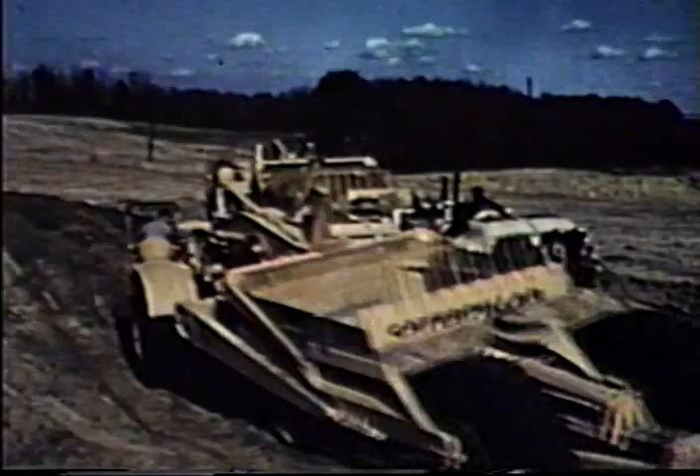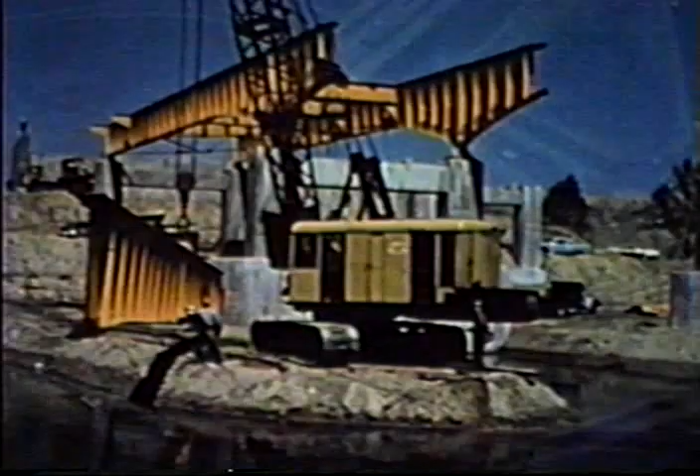It's been a massive undertaking, spanning 40-plus years, costing well over $100 billion, stretching from coast to coast. Ever since President Eisenhower signed the Federal Highway Act in 1956, the focus of transportation funding has been on construction.

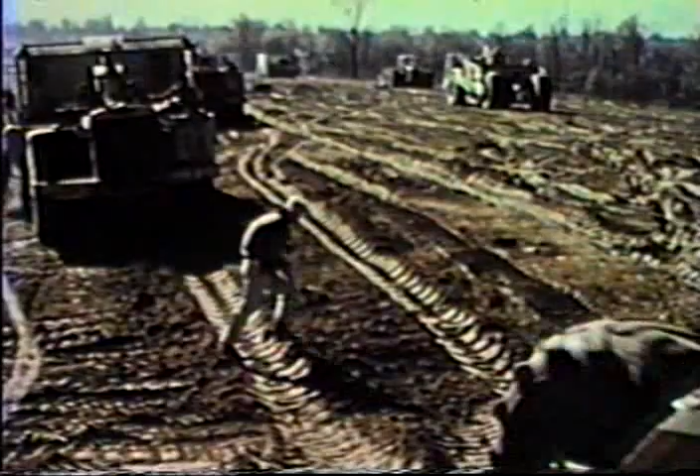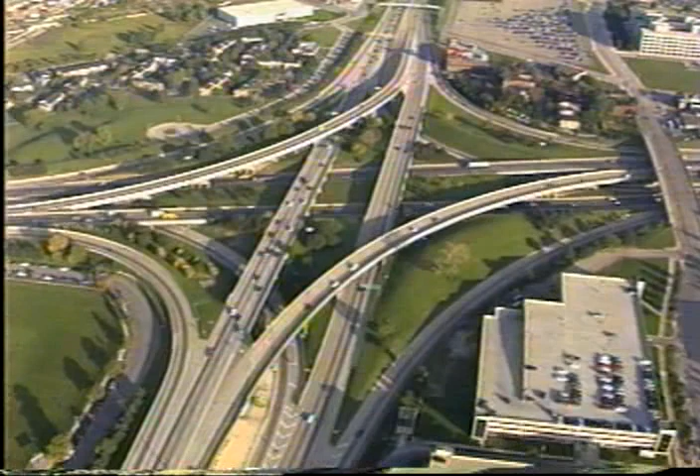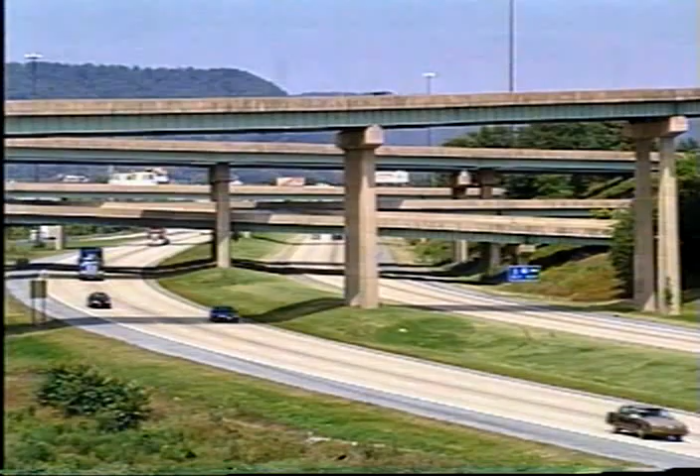Our interstate and national highway systems are the largest public works projects in our country's history, achieved through a unique partnership between the states and the federal government, forming the foundation of our transportation infrastructure, the backbone of our nation's economy.

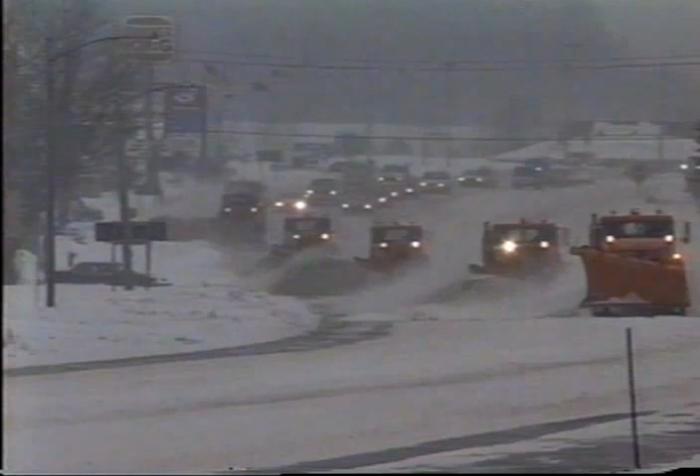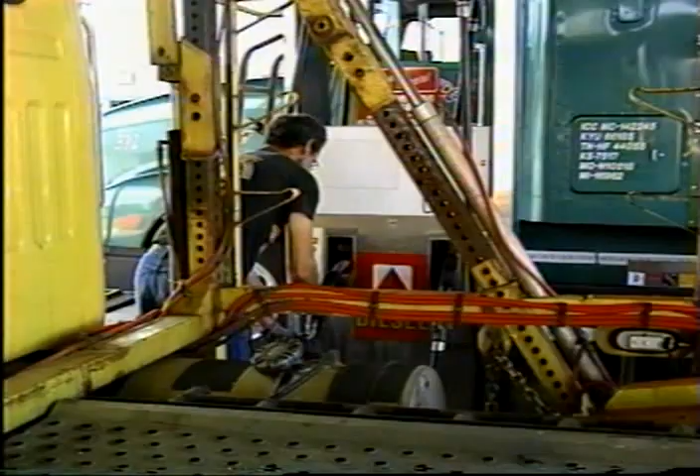Time, traffic, and nature take their tolls on our pavements as the demands on our highway network continue to increase dramatically. At the same time, operating funds have decreased significantly. Revenues simply don't keep pace with needs. In many cases, too, severe reductions in staff contribute to the burden and to the problem.

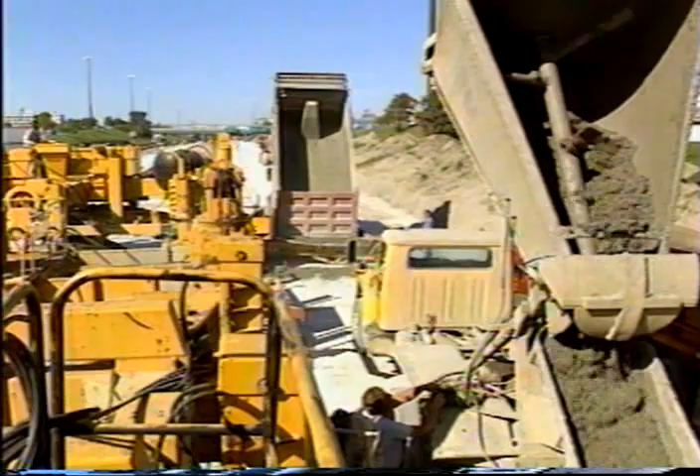For many years, the resources needed to sufficiently preserve our highway infrastructure have been underfunded. We now have needs that far exceed the resources available. The old philosophy of worst first meant directing funds to highways most in need of costly rehabilitation and reconstruction.

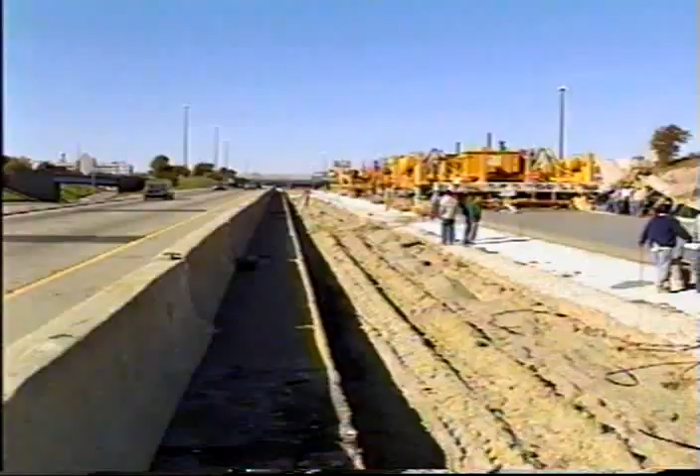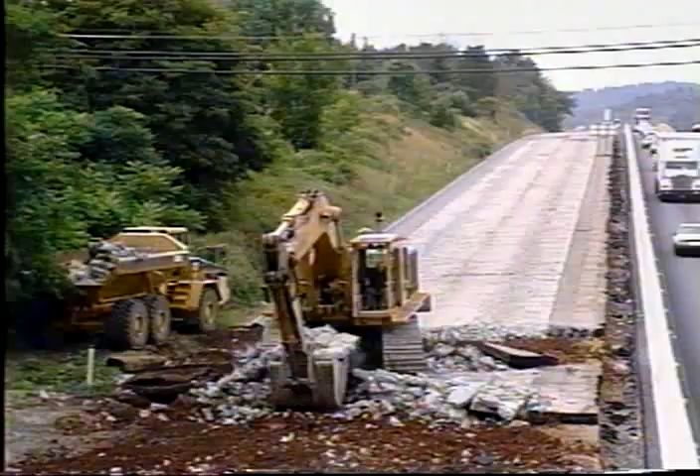Preventive maintenance has too often been delayed or neglected entirely, causing minor defects to become major ones, requiring more expensive repairs, disrupting traffic for longer periods of time, adding much higher costs and inconvenience over the life of the pavement. But the old philosophy is shifting to a new paradigm, protecting our pavements through preventive maintenance.

One of our prime responsibilities is to maintain the investment we have in our transportation infrastructure. And the best way to do this is through preventative maintenance. Congress and the Federal Highway Administration are committed to the timely preservation of our highway infrastructure.

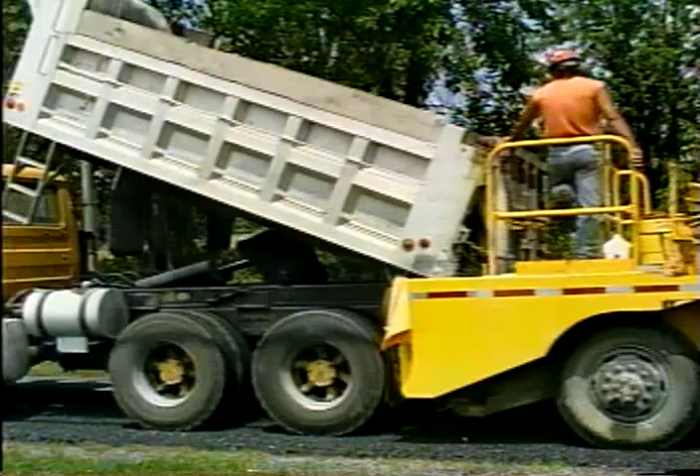As a result of amendments to the Intermodal Surface Transportation Efficiency Act, strengthened by changes to the National Highway System Bill, federal aid funds are available for cost-effective preventive maintenance programs. Preventive maintenance that extends the useful life of our transportation assets.

Every year we extend the useful life of a pavement or a bridge is a year that we don't have to make that large investment needed to rehabilitate or reconstruct. We can continue to provide a level of service our customers want and even demand with a smaller investment and less disruption to traffic.

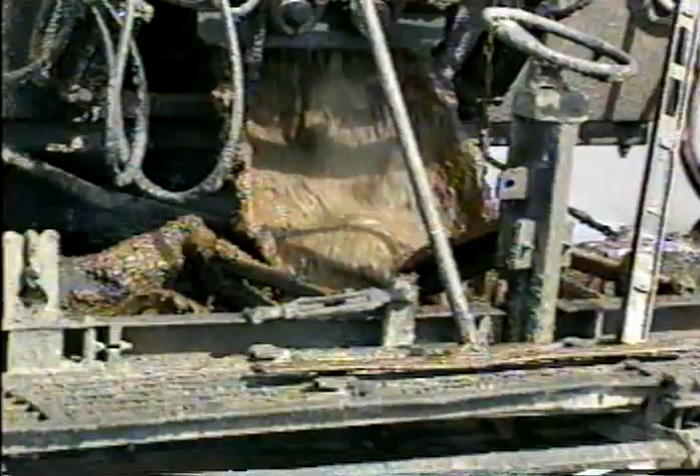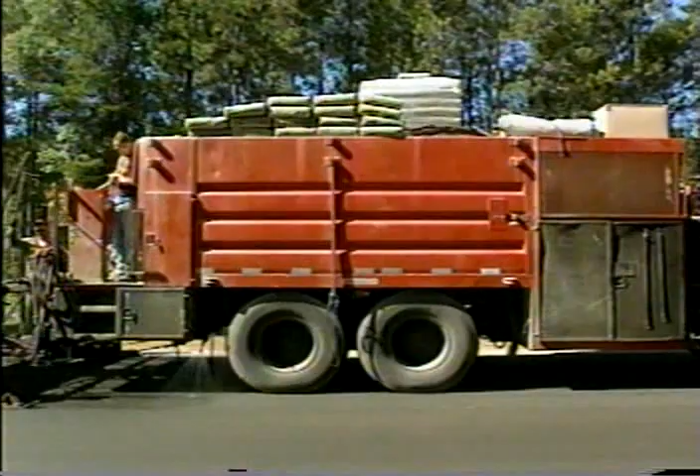Unlike reactive maintenance that works to correct a specific pavement distress, preventive maintenance is proactive, making the most of modern, cost-effective ways to preserve and protect pavement integrity. The goal is to keep the highway network at a given level of quality. And the benefit? Preventive maintenance decreases the rate of deterioration and can delay for years, maybe even indefinitely, costly reconstruction of pavements.

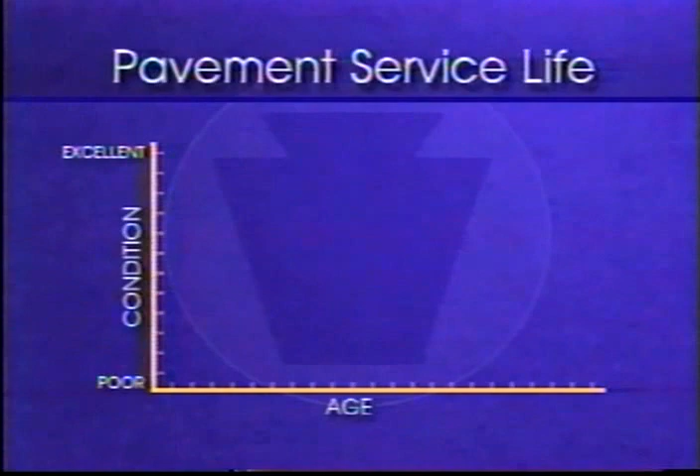Hello, I'm Gary Hoffman, Chief Engineer for the Pennsylvania Department of Transportation. Pavement deterioration of all types can best be represented by this characteristic curve. During the first portion of a pavement's useful life, the pavement is generally smooth and the rate of deterioration is slow. However, as the pavement ages and gets rougher, the daily pounding of heavy vehicles begins to take its toll.

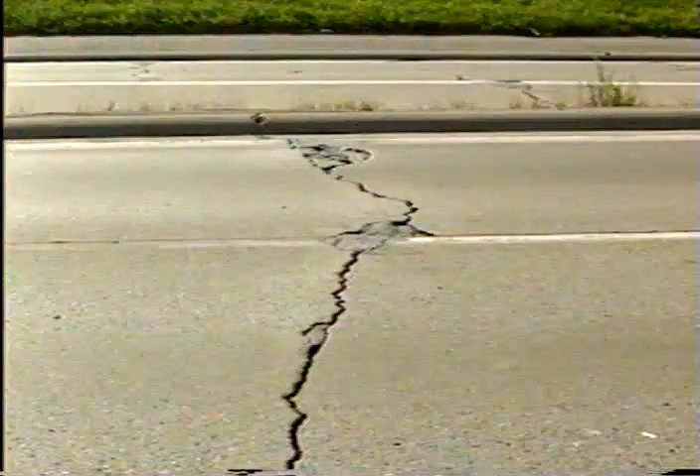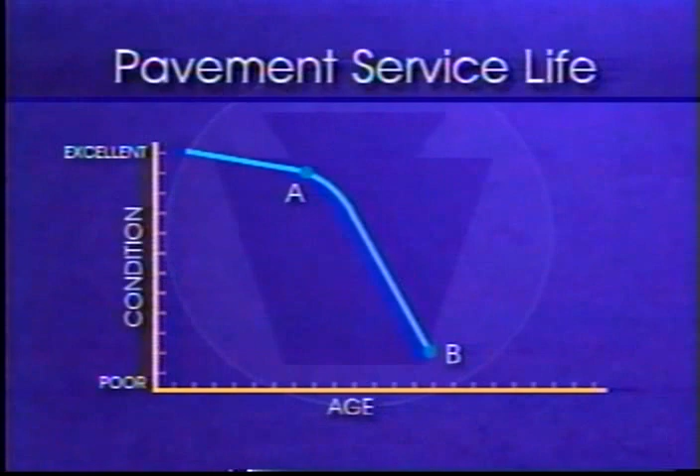Surface cracks develop, water forces its way into these surface cracks, and the pavement deteriorates more rapidly. It is easy for just about anyone to tell when a pavement has reached the end of its useful life, represented on this chart by point B.

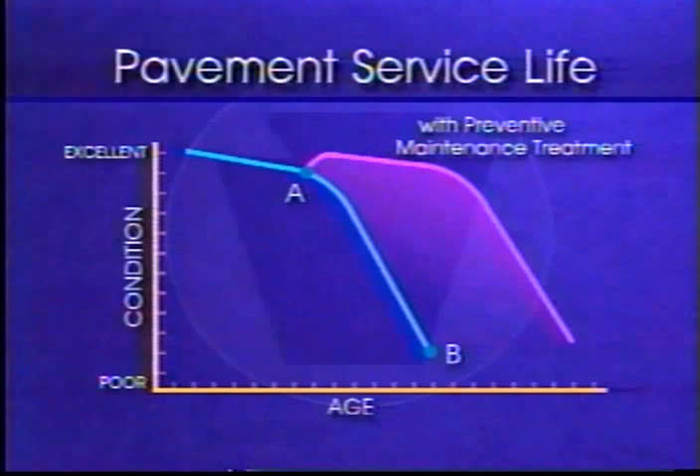The real key to a successful preventive maintenance program lies in an agency's ability to predict when a pavement will reach point A, and then to program sufficient resources to apply the right preventive maintenance treatment. If we can continue on a major portion of our system to extend its life for relatively low cost, another 5 to 10 years, and repeat this, the overall savings in the long run is going to be very, very substantial.

The American Association of State Highway and Transportation Officials defines preventive maintenance as the planned strategy of cost-effective treatments to an existing roadway system and its appurtenances that preserves the system, retards future deterioration, and maintains or improves the functional condition of the system without increasing the structural capacity. In essence, it means doing the right treatment to the right road at the right time. And the right time to begin is now.

Given this positive interest by Congress and AASHTO, it is now incumbent on each of us, working collectively, to advance the concepts for timely preventive maintenance. We must focus on the technical aspects of materials, design, and construction practices. Improved planning and dedicated funding strategies are also essential for the successful development of a pavement preservation program.

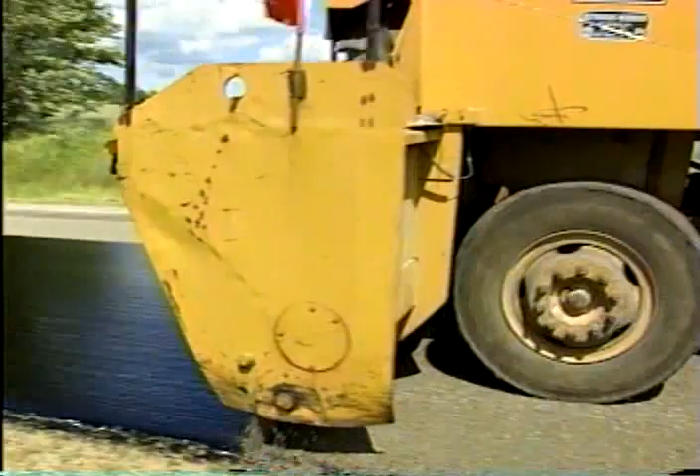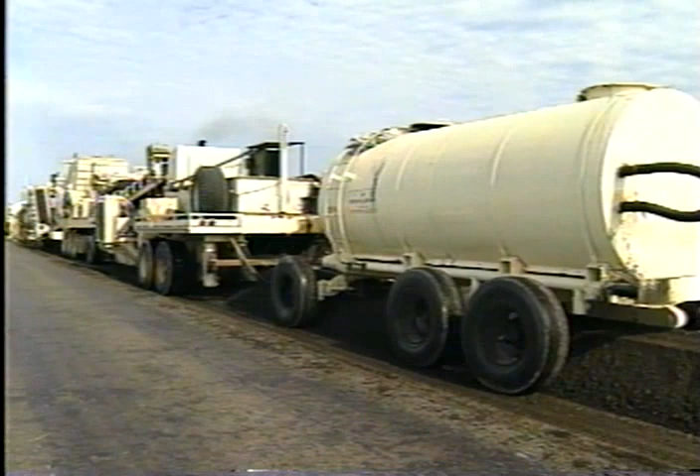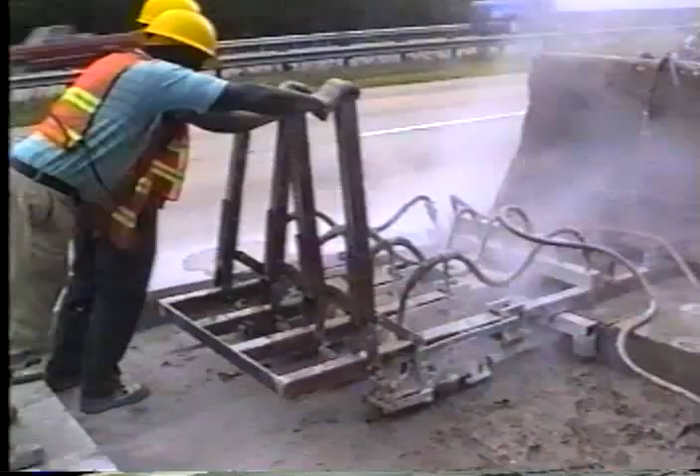Techniques of preventive maintenance range from relatively inexpensive bituminous crack sealing, micro-surfacing, and chip sealing to the more expensive thin asphalt overlays to other techniques on flexible pavements such as in-place recycling of existing asphalt. For rigid pavements, the treatments include full-depth concrete pavement repairs, joint resealing, diamond grinding, and dowel bar retrofits for aging concrete roadways. Using less expensive treatments where appropriate enables spreading the preventive maintenance dollars over more route miles.

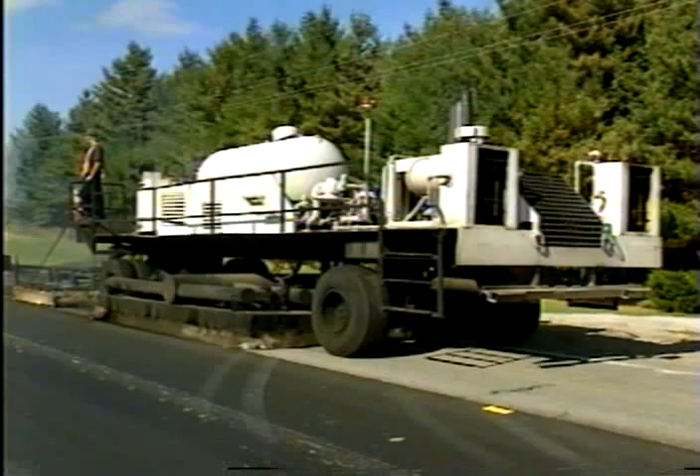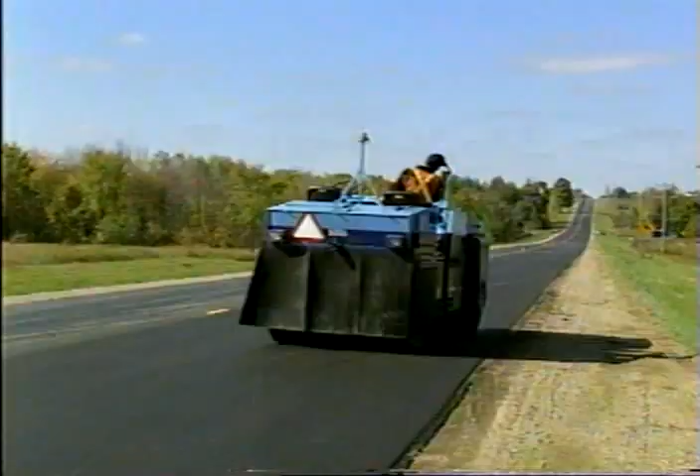Because staff members may not have much knowledge or experience with preventive maintenance methods, a strong commitment to training is essential to the success of the program. People and resources are available to teach personnel about the performance characteristics of the various techniques, how to select pavements that will benefit from preventive treatment, and when, in the life of the pavement, is the right time to do the job.

For example, if crack sealing will correct the condition, then there's no need to apply a seal coat or thin overlay. To be cost effective, it's important to keep the project as simple as possible. Improved planning is the crux of the preventive maintenance program. Here, too, simplification leads to savings. Projects should be kept very, very simple in a preventative maintenance program.

In Kansas, we let our projects with sketches on 8.5 by 11 sheets of paper prepared by our field people and included in the project proposal. It's been very effective with our contractors since most of these are crack filling, pavement patching, thin overlays, even thicker overlays where we're not changing the cross-section considerably. There's no need to waste a lot of time on fancy plans.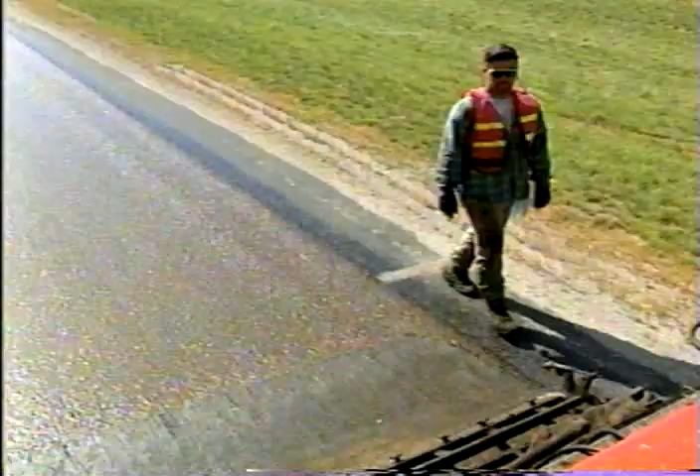Simplified business processes give more responsibility to private contractors for quality control. Preliminary engineering costs, those related to design of the project, are lower. Construction engineering costs are also substantially reduced. But it takes the third element of a preventive maintenance program, dedicated funding, before any long-term savings can be realized. Dedicated funding requires a strong commitment to the philosophy of preventive maintenance, making the choice to preserve relatively new roads with the right treatment at the right time.

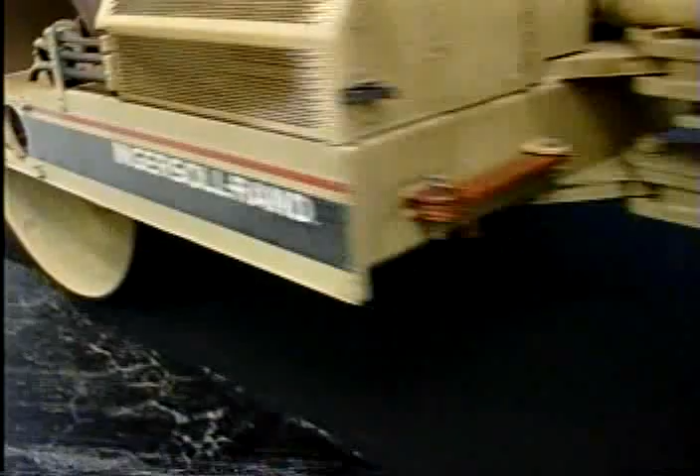One of the problems in getting this program started was with the district engineers. They would say, why are we spending money on a relatively good pavement when we've got terrible pavements that need to be reconstructed? This is a little bit of biting the bullet and spending the money on preventing problems rather than 6 to 8 times more to reconstruct or rehabilitate it after the problem becomes serious.

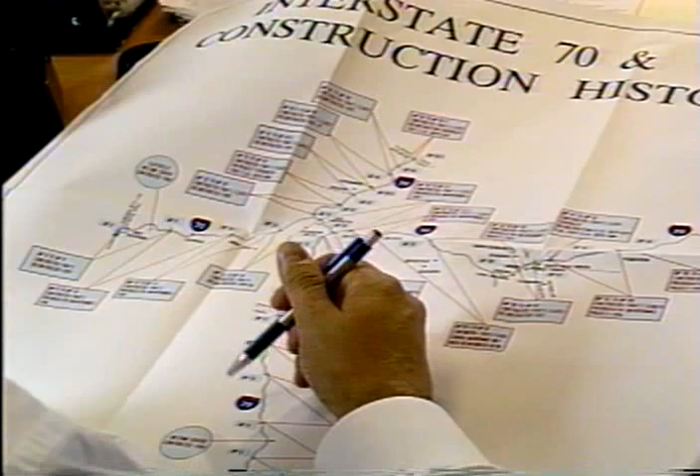It has to have a high level of support from the top management and also a high level of financial support. And it must be substantial and it must be continuous if we're going to preserve the tremendous investment we have in our capital system. Having made the commitment to preserve their pavements, lead states have found that preventive maintenance allows managers to achieve maximum benefit from available funds and to gain greater control over future network conditions and funding requirements. Long-term support and financial commitment are the keys to success.

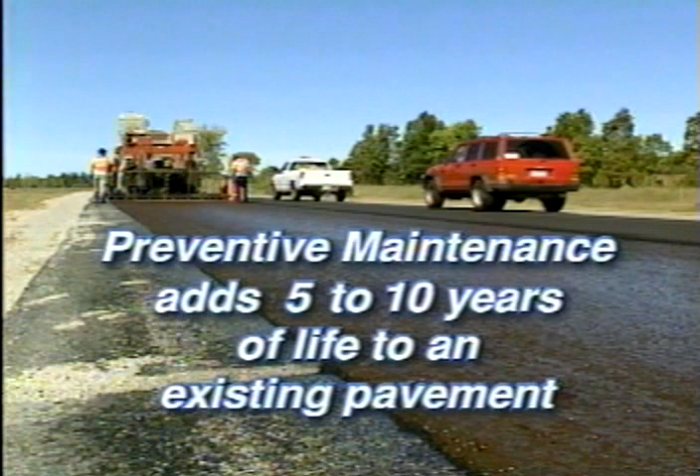Georgia has supported this philosophy since the early 1970s. We spend approximately $70 to $80 million a year on preventative maintenance. Our citizens are reaping the financial benefits of this commitment. Compared to rebuilding a road, studies have shown that for every dollar spent to extend pavement life, a savings of $6 can be realized. Preventive maintenance adds 5 to 10 years of life to an existing pavement. Taking into consideration the cost per year for each year of added life, preventive maintenance projects are at least 6 times more cost-effective than rehabilitation or reconstruction projects.

We found by a recent study that for each dollar we invested in preventive maintenance, the return on extending pavement life was $10. That's a 10-to-1 replacement ratio. Of the original first $70 million that Michigan invested, our return on extending pavement life is about $700 million. This has been very, very important. What that demonstrates is that without spending the first dollar on preventive maintenance, 6 to 10 times the expenditure would be required to reconstruct and rehabilitate to the same pavement surface condition.

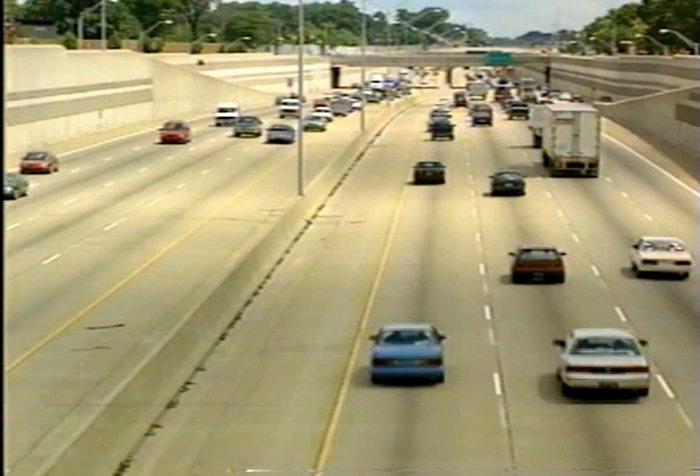The benefits of preventive maintenance accrue not only to highway departments, but more importantly, to highway users. The motoring public and freight carriers enjoy higher pavement quality for an extended period of time, stretching their fuel taxes over the longer term for greater convenience and a smoother ride. The public has come to expect a lot of smooth roads, and that's exactly what we're giving them with our pavement management and preventative maintenance program.

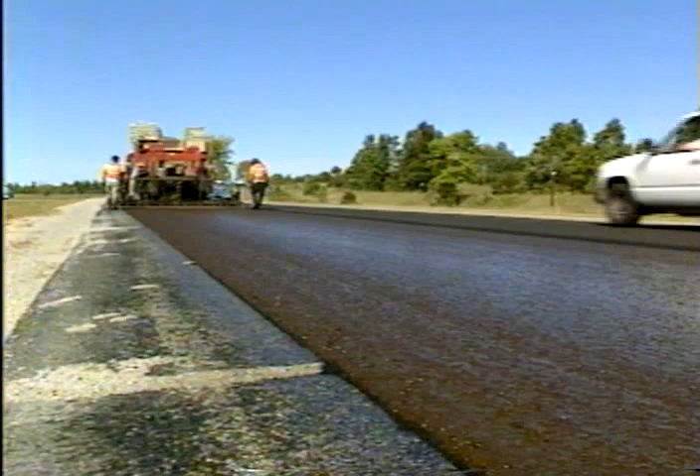Between 1972 and 1996, there's been a 300% improvement in the ride quality on Georgia's asphalt pavements through preventative maintenance. Since the start of our concrete restoration program 20 years ago, the smoothness of our concrete pavements on the interstates has improved by 200%. It takes the discipline, the focus on it. It takes the support of management. It takes the support of pavement design engineers, the policymakers, legislators, and the public that you're going to focus on preventing the problem. Extending pavement life is key.

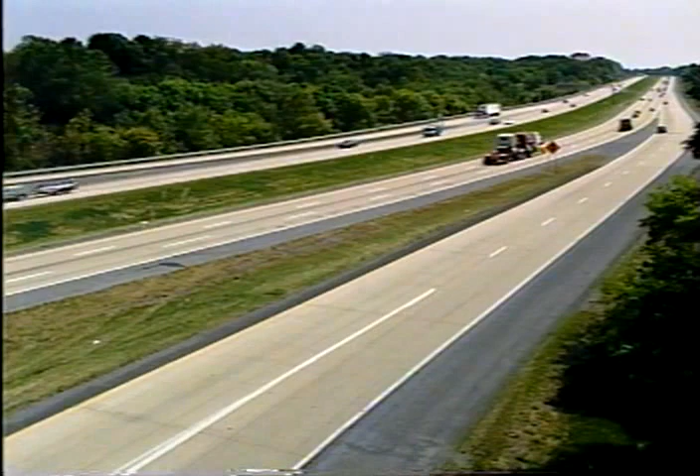Ultimately, preventive maintenance will move Pennsylvania's highway system into the next century. We remain committed to providing the best preventive maintenance procedures to our highways, and with maintenance first as our underlying philosophy, Pennsylvania's highway system indeed has a bright future. Preventive maintenance is a very important tool in the successful management of our highway asset. It is crucial for true system preservation.